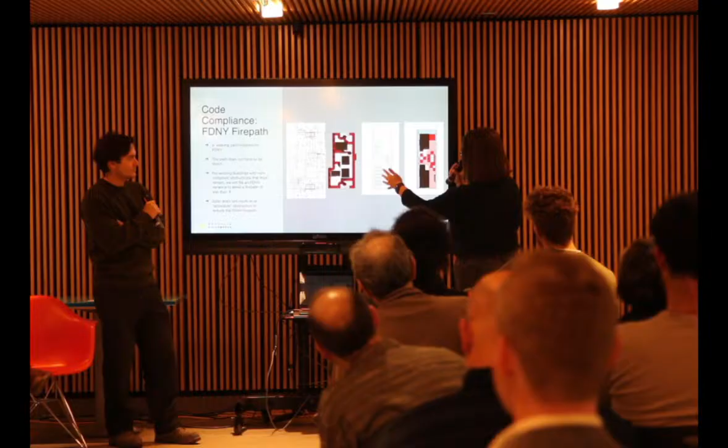But we start with that, and then the leftover vestigial space can go to solar, ideally. That's how the local laws are interpreted. Anything that's not HVAC, vents, zoning clearances, things like that. So you'll see here, this is someone's interpretation of the fire path and where they would put solar, and we were able to kind of optimize that. You want to fit as much solar as possible, especially when you're electrifying these days.

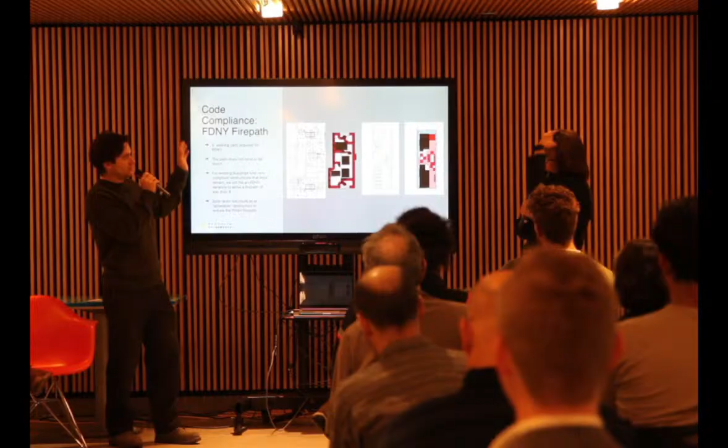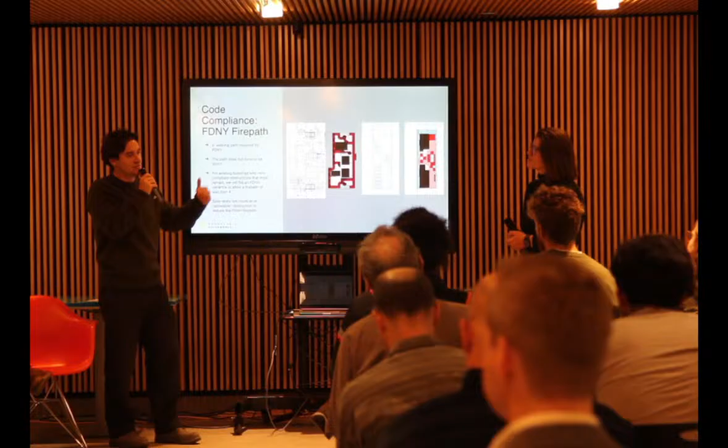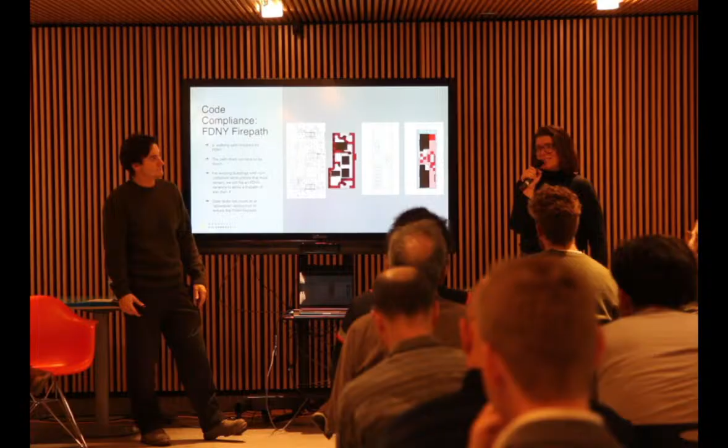Yeah, and the broader story here is that we do all of this for you. We take the heavy lifting of solar out of your hands. We try and make it as easy and seamless as possible within your designs that you share with us, to build something without extra headaches and to reduce hang-ups and DOB restrictions, things like that. One more thing to add, it's helpful to trade backgrounds so that we're always aligned, like any contractor that you're working with. So we love to just request MEPs, STs, all of the things so that we can make sure our filings match yours.

And the other piece, obviously we need to work within the DOB roof restrictions, but we know that often you're dealing with Local Law 92 and 94 on new construction, on new C of O, anything that involves changing the roof. You can often get tagged by the DOB to go back to the design and put solar on the roof. Local Law 92, 94 asks for a sustainable roofing zone. We've become very, very good at determining how that works with each building. The goal is to get you through the DOB as fast as possible without headaches.

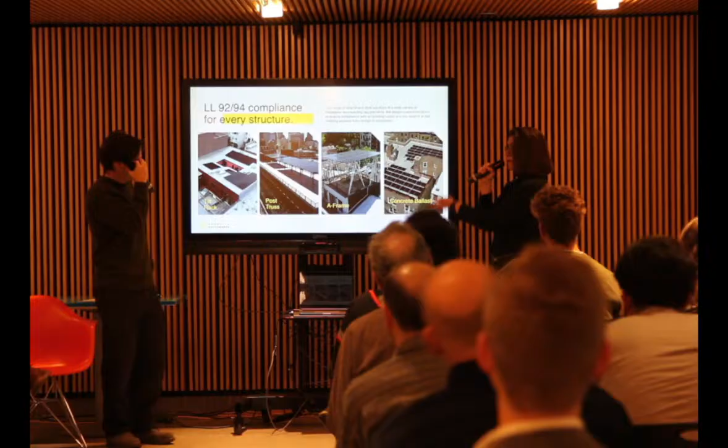In addition, our patented canopy is a great way to alleviate the issues and conflicts with the fire path. It's kind of our superstar of products, I'd say. And here's a cool case study we did. Do you want to talk?

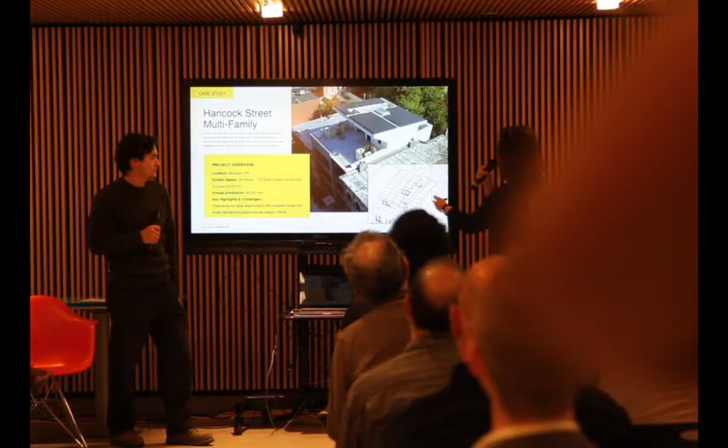Yeah, so this is a ground-up multifamily building in Bed-Stuy in partnership with Paul Castrucci Architects. It's a passive house, and Paul kind of had solar in mind the whole time by orienting his top roof due south, aiming to cover it in solar while maintaining that clear path. So you can see his initial sketch was pretty much followed through to the end.

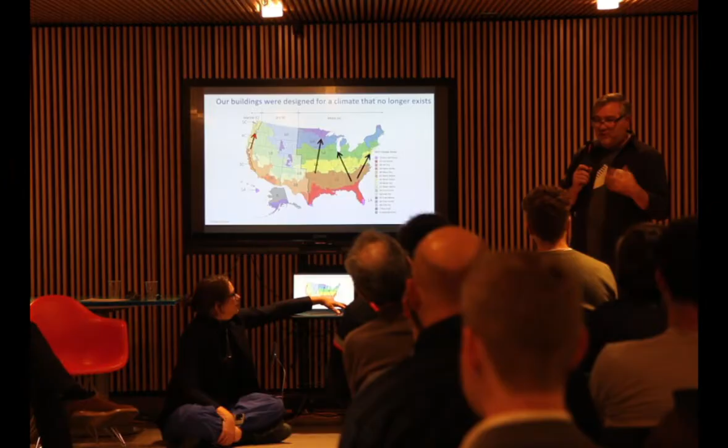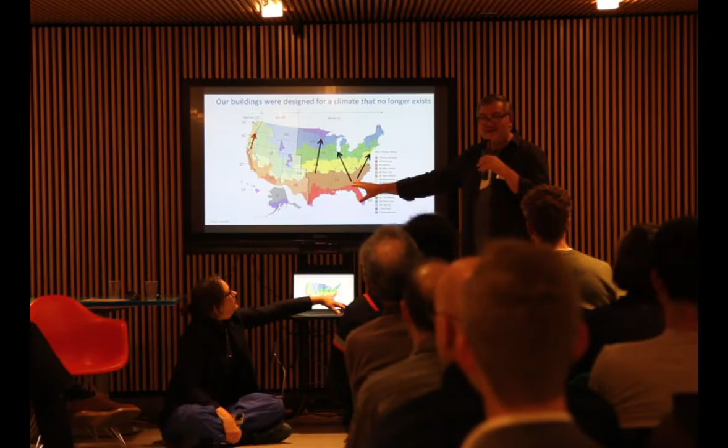On the West Coast, we focus all of our density on arterials, our highways. I call it truck-oriented density. It's not really transit-oriented density. It's a really horrific way of living. You're focusing all of the multifamily housing, affordable housing, in kind of the most toxic places in the city. And then when we add light rail—again, maybe this is a little bit different for you guys in New York—we're not really cognizant of planning comprehensively. We're not providing abundant affordable housing. We're not providing places for people.

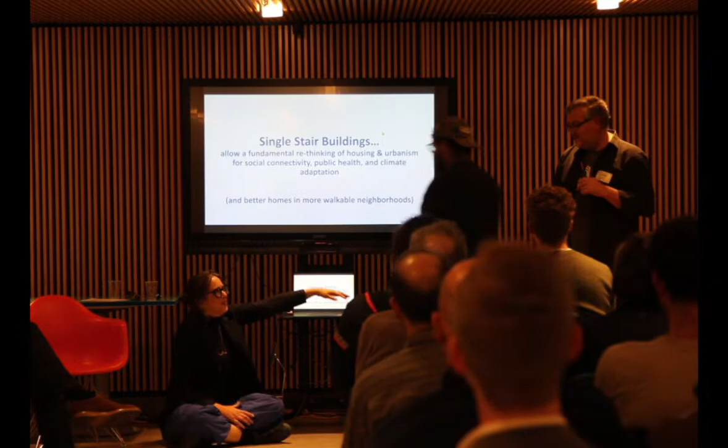Okay, so I've used single stairs like this, ability to kind of reshape the way we're designing our buildings, right? A fundamental rethink of housing and design to be more community oriented, more climate adaptive, and hopefully provide a better way of living.

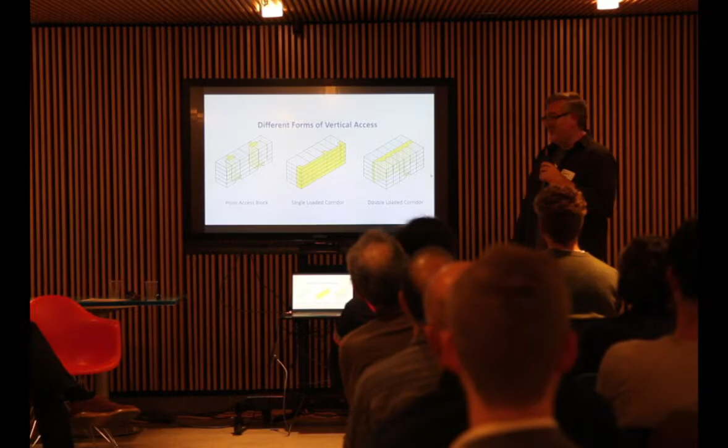No, that's right. So for those who don't know, there are basically 3 means of accessing units in multifamily buildings. Here on the right, the double-loaded corridor. Again, this is kind of the modus operandi of most multifamily housing in the U.S. It's like living in a hotel, right? Corridor down the middle, and then really small units on either side.

Single-loaded corridor is a lot less common. It's more common in Switzerland and Europe. I think in the U.S. we associate it with like motels, student housing, so we don't really see it, but I find it a very fascinating typology. On the left is the point access block, single stair building, workforce or urban housing the world over outside of the US.

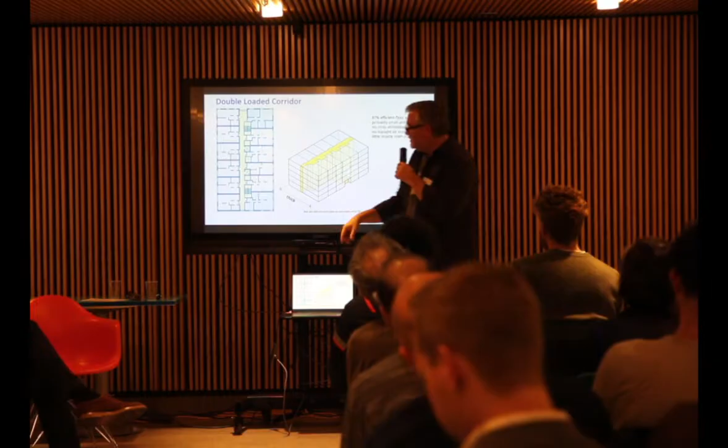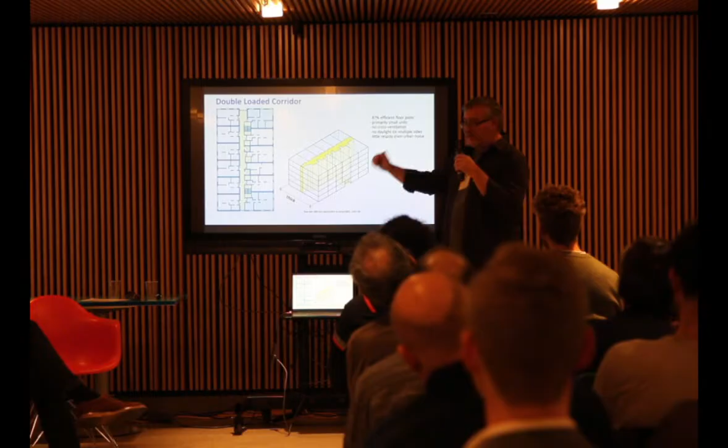The double loaded corridor, right? So we need 2 stairs, 2 means of egress. We need a corridor connecting all of the units to both of those stairs. It's really difficult to get the economics of larger units to work out. If you're on a busy street, right, you're not getting away from that noise, pollution. If you're facing west or south, especially in places that are hot, you're going to be exposed to a lot more heat. It's going to be difficult to mitigate that.

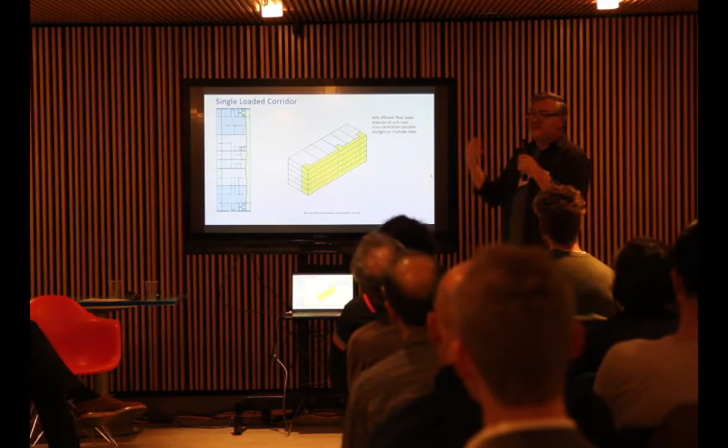Single loaded corridor, again, you do have opportunities for some cross ventilation. You can have daylight on both sides, but it doesn't get a lot of units in. You can't build a lot, and so I think it leaves a lot of FAR on the table. Cities in the US tend to put way more FAR on a per lot basis than other countries do, and so it doesn't really work out on the economics either.

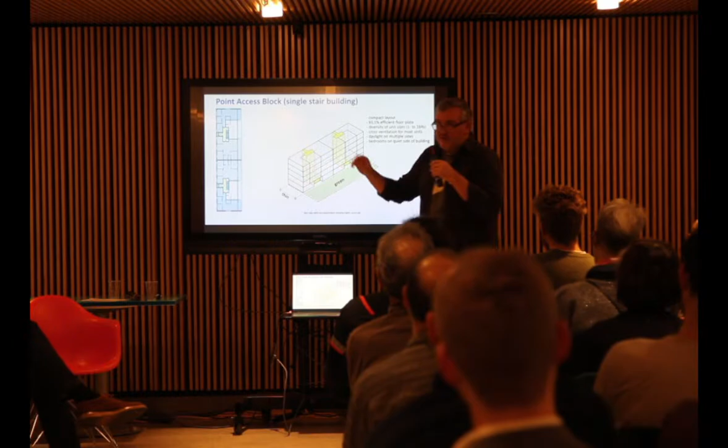Single stair building, what you generally have is a couple of units oriented around one stair with an elevator core, typically, not always, because of weird building codes. In cities like Seattle, we're allowed 6 stories. We can do 2 conditions of single stair buildings per lot. There's a maximum of 4 units around each stair core. So we can get kind of smaller buildings somewhere between like 10 and 50 units.

It's incredibly efficient. You get a broad diversity in unit sizes. It also, in this weird roundabout way, induces larger units. So a big issue we're struggling with in development is like, how do we get family-sized housing? Well, this is how the rest of the world does multifamily or family-sized housing.

Kind of the limitations of the International Building Code, I think, are becoming more and more apparent. This is a new development on a block in Seattle, wonderful highway here. You can see these are all micro studios. They have one window that opens. Pollution, noise, you're never opening your window here. If you're on the courtyard, you're in a fishbowl looking at people about 40, 50 feet away. There's no trees, there's no space for a community.

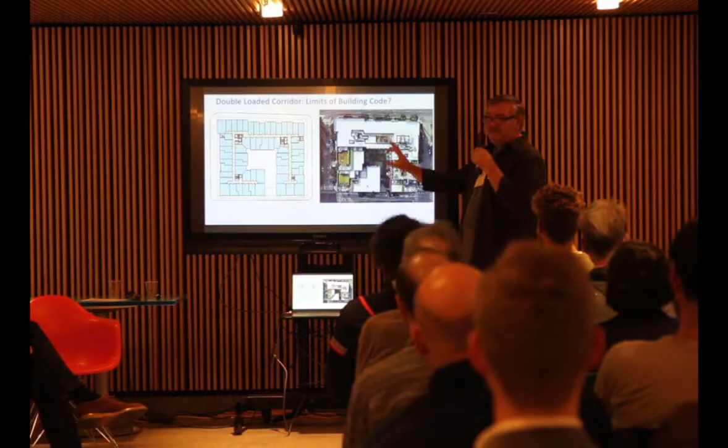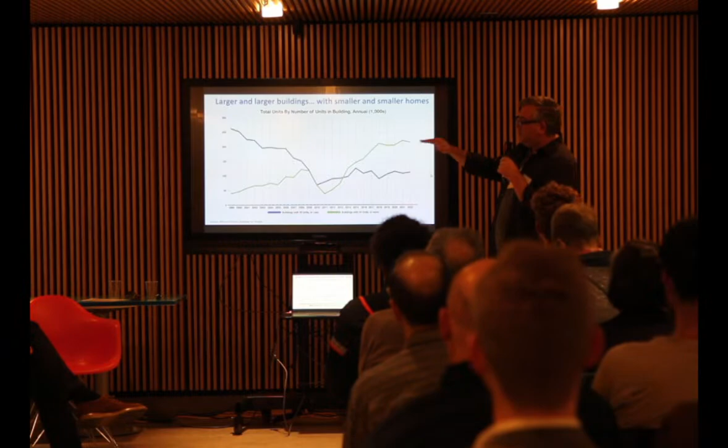It's a very radically different way of developing versus other places. Hasn't always been this way. These massive buildings are really, since the 2008 recession, kind of when everything flipped. We used to build, the blue line here, smaller and medium-sized buildings, and the green line is greater than 50 units, right? And so now those massive buildings are kind of the overwhelming majority of new construction in the US.

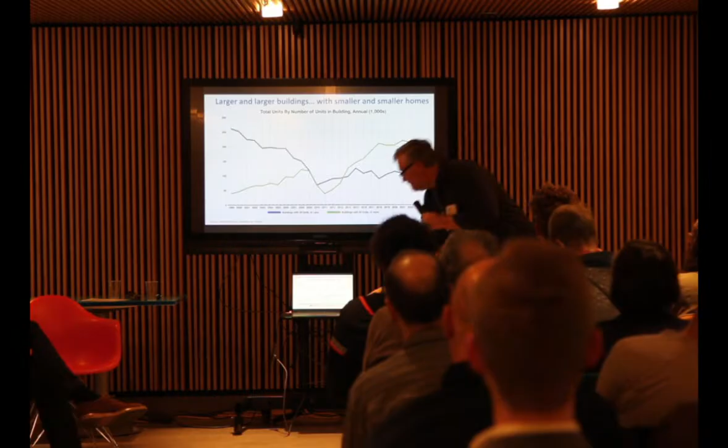Why do I think this is important? Well, our building codes and our zoning codes interact in these really fun ways to influence redevelopment.

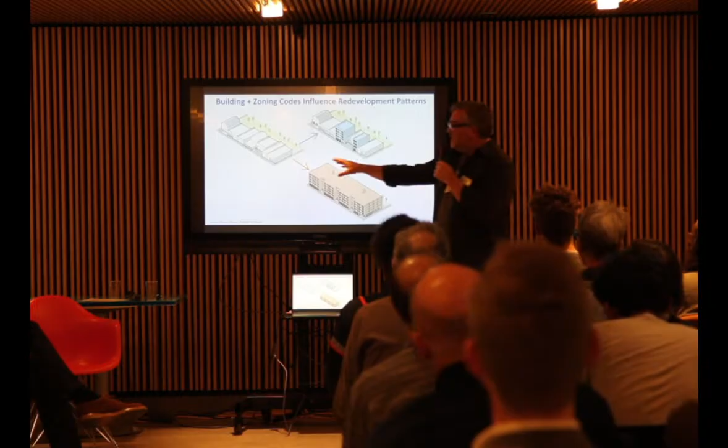In cities like New York City and Seattle, where we can do single stair up to 6 stories, we have this existing fine-grained urban street front. You go to Brooklyn, you've got 25, 35-foot lot buildings, 8 different things on one lot. So when you redevelop, you can just redevelop that one lot. Maybe it all goes at the same time, but it's 8 different owners going different ways, and there's more variation, and you still maintain that fine-grained nature.

But on the West Coast and most of the US, all of that is just going to be scraped because of our double-loaded corridor requirements and financing requirements, and we'll just put a big, ugly building with no space for trees or green.

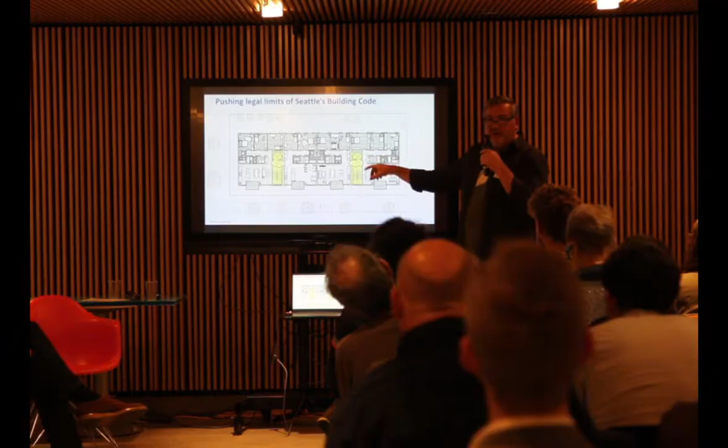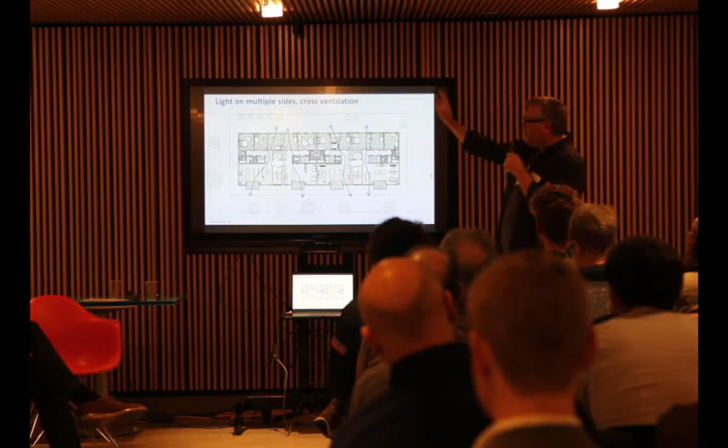I've highlighted the stair core here in the middle. So daylight in the stairwell, that's pretty rare in a lot of US buildings. It's extremely common in Europe and other countries. Our kitchen, living, dining are oriented parallel to the facade instead of perpendicular to the facade. Our bedrooms, this allows the building to cross-ventilate. We've got windows on 3 sides for these units, 2 sides for these units. This is dual aspect, triple aspect.

This is a lot like living in a detached house in much of the US. This was on a really busy street, so it was really important for them to put the bedrooms on the quiet side of the building, to get away from the noise when they're trying to sleep. Usually in Seattle, it's really cool at night. We don't have a lot of humidity in the summer, so everyone sleeps with their windows open, and it's just wonderful.

Our double-loaded corridors induce these deeper and deeper units. Planning departments and politicians want to ramp up the amount of built area on lots. So we have these in Seattle 80, 90, 100-foot deep buildings. The unit ends up being somewhere between 35, 45, 50 feet, but you kind of have to fill it up. All of a sudden this 2-bedroom unit has 2 full bathrooms, massive walk-in closets. The kitchen is like 40 feet away from the exterior of the building, so you don't have any daylight in there.

Well, in Europe, again this is kind of based on the Seattle plan as well, your kitchen is oriented the other way. You've got abundant daylight, you've got cross ventilation. Really, this footprint is kind of the same as the building unit plus about half of the hallway.

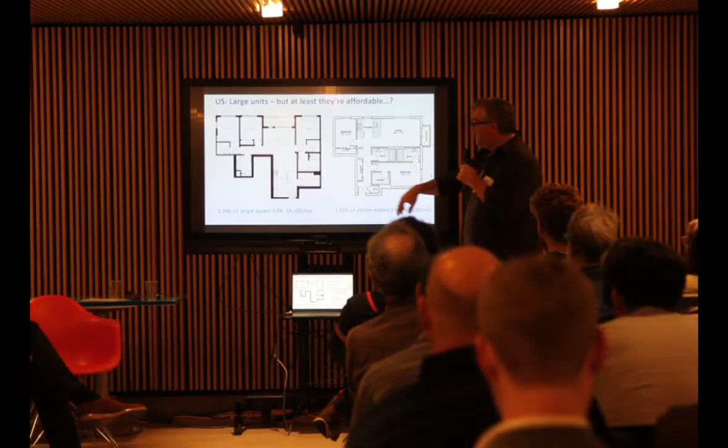And so we have these massive units in West Coast housing, 3-bedroom unit, 1,200 square feet, 2 full bathrooms. There's really only daylight on one side of the building, it faces north, so the entire time it's really, really dark. Maybe you're lucky and you can live on a corner. Well, you've got 2 bedrooms, and then it's so expensive it's designed for 2 roommates, so again, 2 full bathrooms. This isn't something you would find in most of the rest of the world.

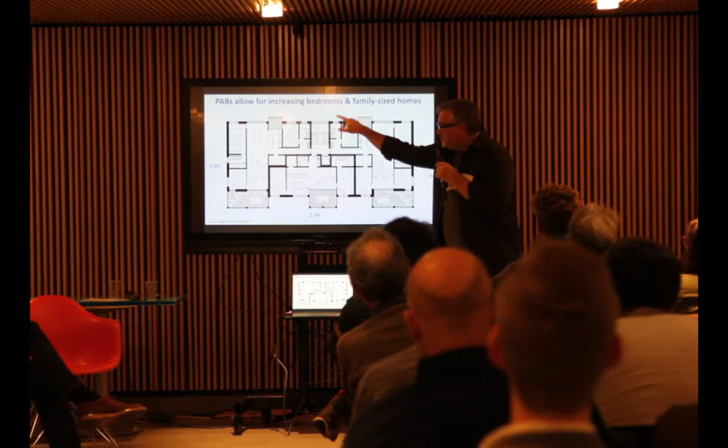Like I said, this is how the rest of the world builds full family-size housing. This is a single-stair building in Switzerland, 3 units per floor, central stair, and again daylight is really, really important. It has an elevator for a 4-story building. Stephen, I think, might talk a little bit more about this. You've got a 2-bedroom unit down here, a 3-bedroom unit over there, and a 4-bedroom unit over here. There are no windowless bedrooms, and the end units have daylight on 3 sides. It's just a very different way of thinking about habitating in the city.

I'm super fascinated with Swiss co-ops and Swiss building codes. There is no limitation on the number of single stair conditions in Swiss buildings.

It allows, I think, much more diversity in unit types and sizes. If you're a developer, that gives you more opportunity to tailor your building to different communities or different residents—you're not just doing everything for students or everything for seniors or everything for tech workers. The floor plate savings—you can get the same number of bedrooms in 4 units in a single stair building versus 6 in the double loaded corridor.

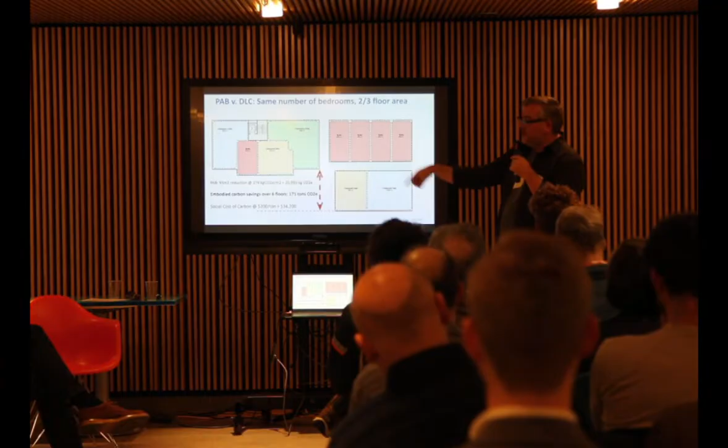We've started looking at some of the carbon impacts of this. Not only are you saving embodied carbon, you're getting the same number of bedrooms in 2/3 of the floor area. There are also construction cost savings associated with this.

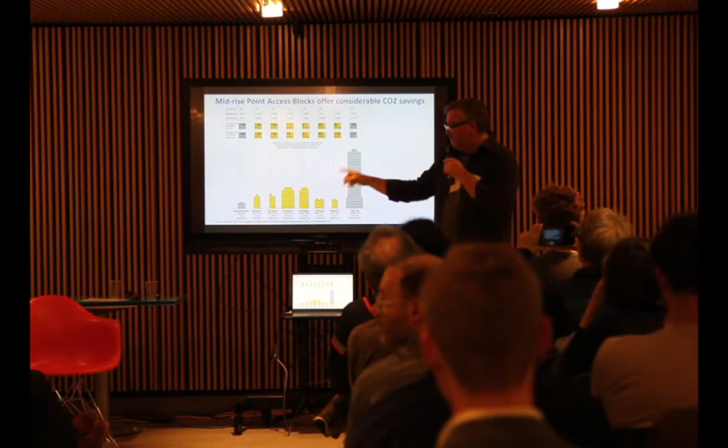For all of you embodied carbon LCA nerds—again, maybe not so relevant to New York City where you don't have a lot of mid-rise wood frame construction—Half Studio in Toronto did an LCA looking at the carbon impacts of different building types, all the way from detached housing to high-rise, and the 6-story wood frame building, pound for pound, was the best from an environmental standpoint.

So, does fire burn differently in the US versus Canada? Because our codes are a complete anomaly. Canada's single stair regulations are actually more restrictive than ours, although there is an effort to change that at a much higher level, at the federal level.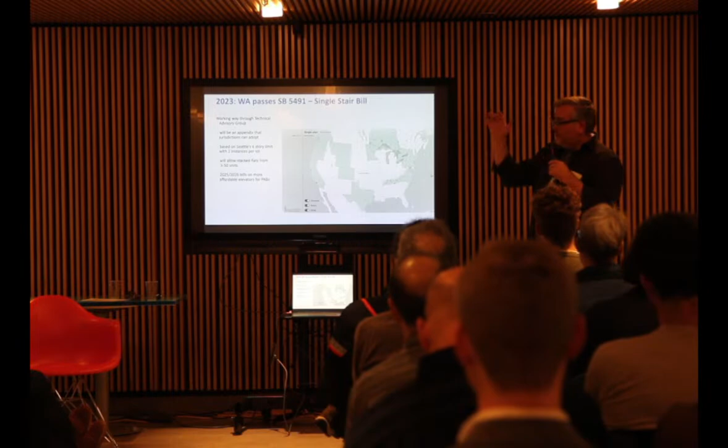In 2023—well, Seattle has allowed single stair buildings for 50 years. Originally we didn't have sprinkler requirements, there was no height limit. In the 80s there was a lot of anti-development insanity around the city, and most of downtown was downzoned. At that point the single stair height limit dropped down to 6 stories, and it's pretty much stayed at that point the whole time.

In 2023, I worked with a state legislator to basically take Seattle's legislation statewide, so that more of the cities around us who are also having housing crises could have more opportunities for really wonderful infill buildings. It passed as a study bill, and it's now being reviewed by an advisory committee. I don't know where it sits with that.

But related to that, I've started having conversations with people in Michigan. Stephen and I know each other from Twitter for like 20 years, and we started talking about single stair a long time ago. Now there are about 20 states, I think, that have some form of single stair legislation, either as an advisory bill, a study bill, or actual legislation.

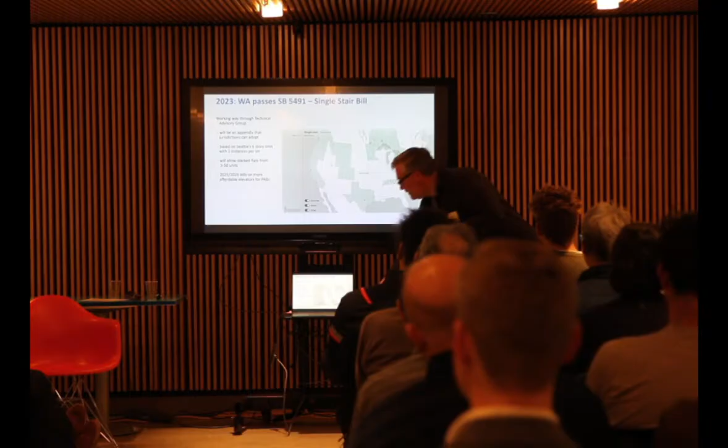Blows my mind. The future of the IBC is a little bit—

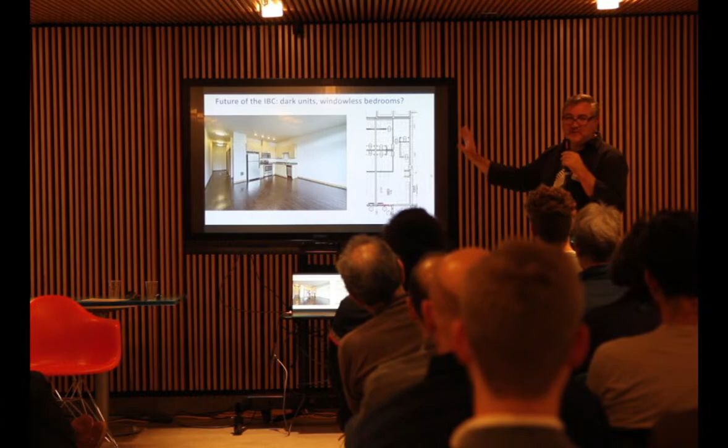This is a re-entrant corner of the building. There's a small courtyard here, and so there's only 1 window into this thing. This isn't designed for families. This isn't designed for—maybe it's designed for students or roommates—but the quality of life in that is really, really inferior.

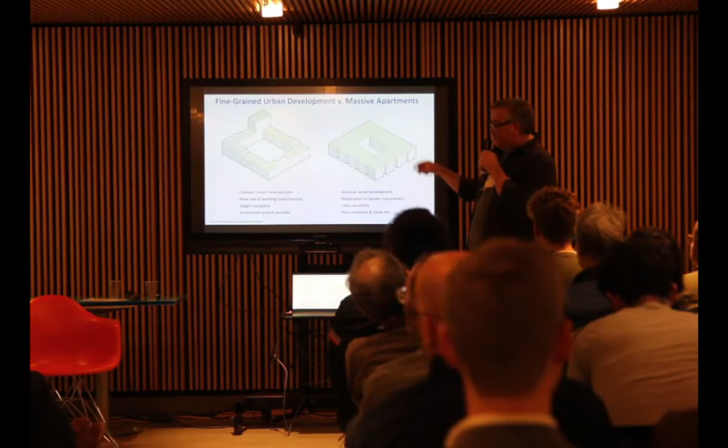And when we start to look at the neighborhood block scale, we get that kind of fine-grained urban development, opportunities for different building heights, different types of buildings, different ownership tenures, versus one big block being massively redeveloped.

More opportunities for open space, more opportunities for air to flow through the network. This form of development is really common in a lot of European eco-districts. It allows for radical diversity at the block level, economically and socially. You could have townhomes, market rate housing, student housing, co-ops, self-built homes that people come together and build, arranged around a courtyard. This is how people can develop in other places, but it's really difficult to do that here, and so we don't get that economic and social mix.

I also think we need to be taking issues around urban morphology, how we reshape our cities, and climate adaptation, how heat is going to affect certain areas in the future, much more seriously.

Can we start to view redevelopment of eco-districts differently? I was in Hudson Yards today, and it's the most sterile place I have ever been. There's a park, but it's got cars on 4 sides. There's no places for kids to play. My mind was blown at how sterile and bad that development was versus something like this.

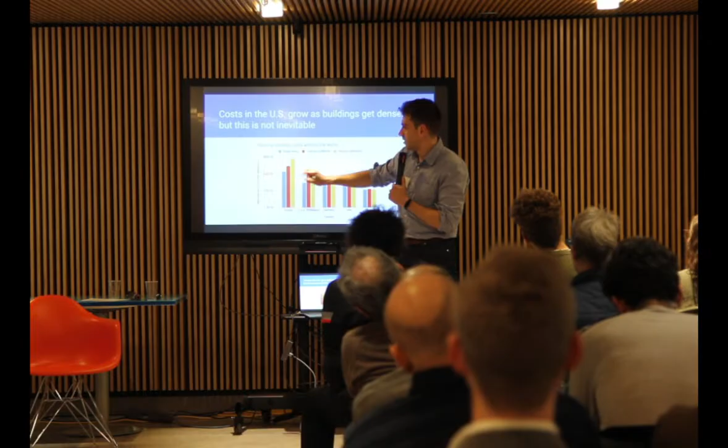So we have some things that get more expensive. You need an elevator in a mid-rise apartment building. You don't need an elevator in a single family home. You need more advanced fire alarm systems in a mid-rise that you don't need in a single family home. So those costs rise, but then you have some other costs that fall. You only need one foundation, one roof, one lobby, whatever. There are fixed costs, so you have what economists would call economies of scale and diseconomies of scale. They balance each other out. In the US and Canada, this is not the case. As the building gets denser, the per square foot cost just rises and rises and rises.

And this is a problem because we are, as a society, building more multifamily buildings, realizing the importance of cities. It used to be in the 90s, almost all development was in single family houses, and increasingly it is moving towards cities for environmental reasons, economic reasons, whatever it may be. And with it, we're getting an increased cost of construction that you don't see elsewhere.

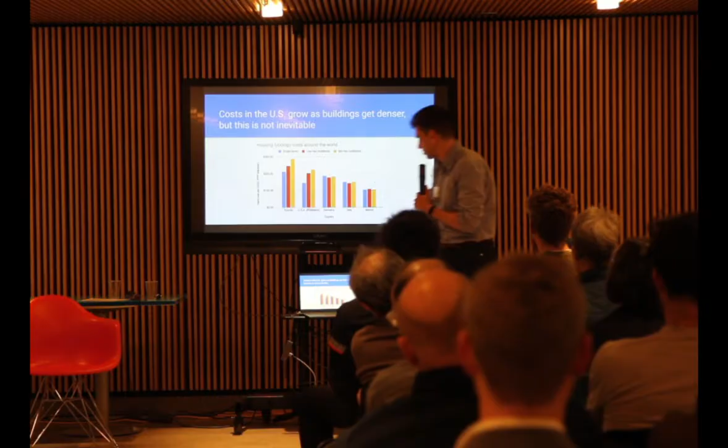And I am going to make the assertion that the reason why we have this cost gradient as the buildings get denser is because of our codes. It's not something inherent in the US or Canada that you don't find in Germany, Italy, Mexico. It is fundamentally in the codes. And it is fundamentally a fear of heights in the codes.

So as buildings get taller, code requirements will naturally grow. This is the case everywhere in the world. But in the United States and Canada, the growth happens in much larger thresholds and in much more dramatic ways than abroad. So the code requirements come, and they come sort of heavy and fast.

So just to give you some examples, at what height is a second stairway required? Typically in the United States, it's around 4 stories. In New York City, it happens to be 6 stories. In Europe, Asia, Latin America, probably something more like 16 stories you can build before you have a second stair. These are approximations, because obviously Europe has a lot of different countries, but you can also think of Europe as a stand-in for Asia and Latin America.

Australia, it's pretty similar. Standpipe, this is the pipe for water that's essentially an extension of the hose that the fire department uses. Typically in the United States, it'll kick in around 4 stories. I think in New York City, it's actually sometimes 7 stories. In Europe, it'll typically be a high-rise building, so around 8 stories.

Stretcher elevator, like the elevator is so large that it can accommodate a fully flat stretcher. Typically in the US, it's 4 stories. In New York City, I think it's 5. Typically in Europe, it'll be around 8 stories.

Sprinkler systems, every single new building pretty much in the United States, except for single family houses, will have a sprinkler system. If the code people had their way, they'd even be in single family houses. They are in California and Maryland. In Europe, frankly, you're unlikely to ever see a sprinkler system, but if you do, it'll probably be around 20 stories, something like that.

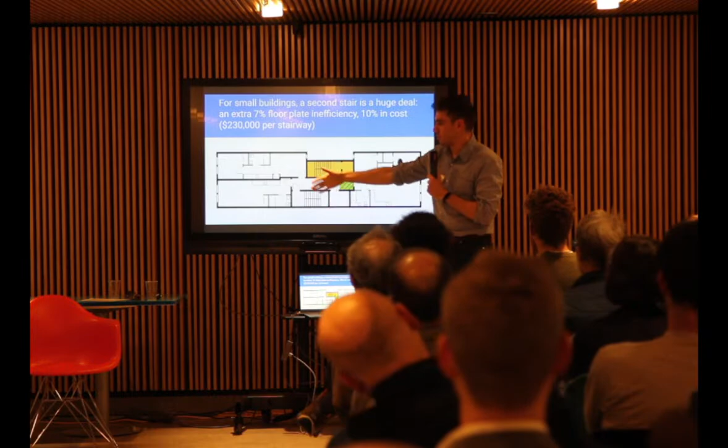So single stair. So for a small apartment building, which is absolutely not what the code writers have in mind at the ICC when they imagine an apartment building, but in New York we have a lot of these. This one happens to be in Jersey City, but it's very similar. 25 feet wide. The lot is 100 feet deep. The building, let's call it 80 feet deep. If the national code writers had their way, it would have these two stairs right here.

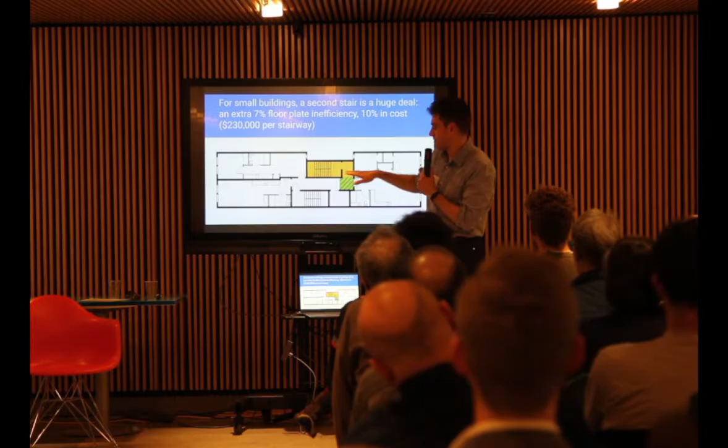It's going to take up about 7% of the building. 7% of the building is a lot. 7% can definitely make or break a project financially. So it takes up a lot of the floor plate. It's about 10% of the cost. One single stairway for a 4-story building is about $230,000 roughly. So it's a big cost.

Next, talk about elevators. So elevators in the United States are about 3 to 4 times as expensive as elevators in Europe, Asia, the whole rest of the world. As a result, we tend to have very few of them. So here's just some examples of quotes for elevators. These are 5 or 6 stop elevators. So in Belgium, Ile-de-France outside of Paris, once you do the conversions of currency and purchasing power, you'll get $50,000, $60,000 for the elevator. Whereas in the United States, you'll get $170,000, $180,000. So they're far more expensive. As a result, we tend to build a lot more walk-up buildings in the United States than you find abroad.

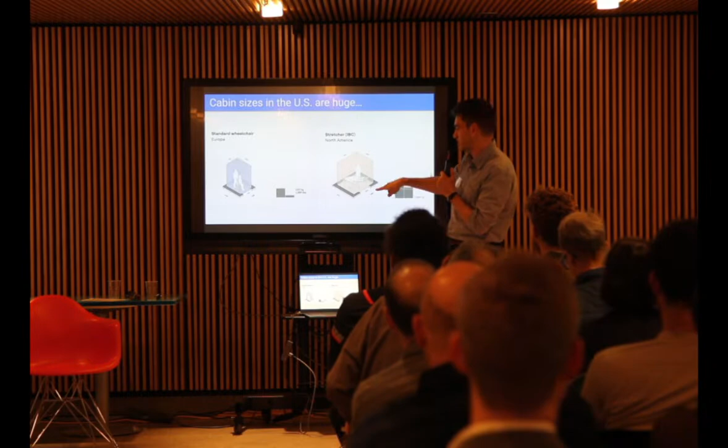An elevator in the United States is about twice the size of an elevator in Europe for a mid-rise building. In Europe, a mid-rise building elevator will accommodate a wheelchair and a person standing behind it, but it will not accommodate a stretcher. Medical responders will take the stairs or prop you up in some way. In the United States, it has to accommodate a stretcher and also a turning radius for a wheelchair, though most power chairs can't even turn in these anymore, so it doesn't even effectively function as that. So the elevators are about twice as big, and that drives a lot of cost.

Beyond that, we have a different technical standard. Beyond the size of the elevator, the building code is a document. It's not exactly fun to read, but you could probably understand it more or less. But it references all these other technical codes. So the building code will say the hallway has to be this wide, the wall must resist fire for 1 hour, but then it'll say the elevator has to be built to some other standard—it'll reference another document. There's one for sprinkler heads, and any part of the building you can imagine has a standard it references.

There's been a process throughout the rest of the world of harmonizing standards so the same gypsum board, the same elevator, the same sprinkler head, any doohickey you can imagine, can be sold all around the world. The United States tends to sit outside of this consensus. In elevators, every country in Europe used to have its own elevator code and standard, and then in the 70s and 80s they harmonized them, creating a European elevator standard. Given that 3 of the 4 major elevator companies are headquartered in Europe, the entire rest of the world started to adopt the European elevator standard. At some point in the 2010s, even China adopted it—a knockout blow to every other standard in the world—and the European standard took over.

So whether it's a whole elevator or a little part for one, you can sell it all throughout the world, more or less the same thing. The exception is the US and Canada—they've stuck to their own standard. This means we have a much more restricted market. It costs a lot of money to certify something to a standard, rightly so, since elevators are safety critical devices. It's important that every door, every button meets the exacting rules of the standard. But it costs the same amount of money to certify to the global standard as to the North American standard, and North America has many fewer elevators—the United States has about as many elevators as Italy or Spain does individually. So naturally companies certify to the global standard, and only if they think they can sell tons of them do they also certify to the North American standard.

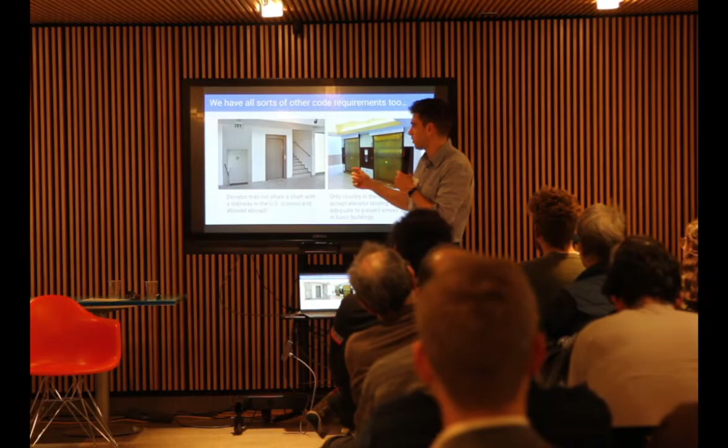So we find all of these other code requirements, generally for fire protection reasons, that make it more expensive to add elevators, and you see it all throughout buildings.

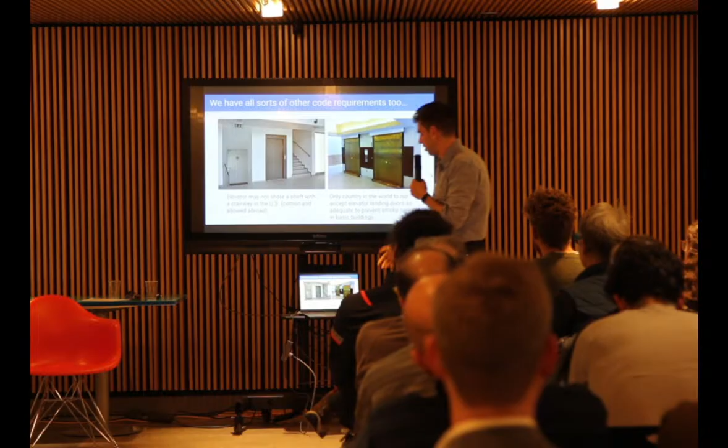All right, plumbing, single stack venting. The plumbing codes in the US are very anomalous as well. Just as an example, you have what's called your drain waste vent stack. So you flush the toilet, water goes down. Here's a toilet, here's a sink, whatever, water goes down. As a child, maybe you're bored at a restaurant, playing with a straw, you stick the straw in your water and put your finger on top, lift it out, and the water comes out. You don't want that to happen in a drainage system. You want everything to flow properly. So you don't put your finger at the top, you let water flow down through it.

In the United States, we decided through some sorcery in the 19th century that just having this little thing go to the atmosphere and introduce air into the system is not enough. We need a whole separate system of vent piping that connects at every single fixture, doubling the cost of this whole stack. It's necessary at some height, maybe 10 or 20 stories, but not necessary for a single-story building as we require in the United States. It's just one example of the over-dimensioning and overkill we have in our plumbing systems.

And then waste collection, I'll breeze through this one quickly since I think I'm over time. So we have a very expensive system.

A lot of things I was talking about, elevators, venting—these are mostly, well not for elevators, but the venting for example in the plumbing system—mostly an initial cost to the building. But our buildings in the United States are also extremely expensive to operate. It's very common in Europe to find a new building where the condo fees are 100 or 200 euros a month. In New York, they maybe start at 500 and go up to 1,000 or 2,000 bucks a month just to operate the building per unit.

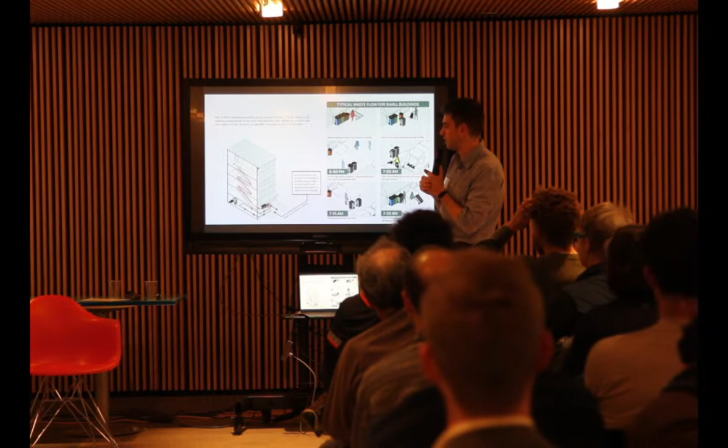One of the major reasons is waste collection. In New York, we assume the building has to collect all the waste in the basement, and then someone has to bring it out. We used to dump our trash bags on the sidewalk three times a week. It was very disgusting, there were lots of rats. So now we're putting them in cans. But this means you need to pay a super or a porter to come to your building three times a week to bring the trash out, and three times a week to bring it back in.

For a small building, you're constantly having people come out to take the trash. And when the Department of Sanitation collects it, they have to do it manually. We can't have the mechanical collection that the rest of the world has because we have a whole wall of parked cars between the street and the waste container, so they have to drag it. It's one of the most dangerous jobs in New York.

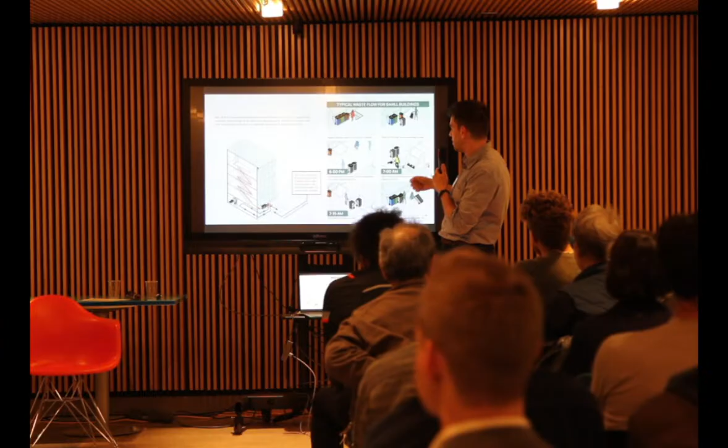Working for DSNY. Whereas in Europe, or in some parts of Europe and some parts of Asia—not as common, but it happens in many places—they just put out bins, you take your trash to them directly, it gets collected mechanically. Very efficient, very safe, far fewer injuries, and it costs nothing to the building. In New York, buildings pay on average about 75 bucks per month just to move waste from the building to the curb. If you have a common collection system, you pay nothing at all.

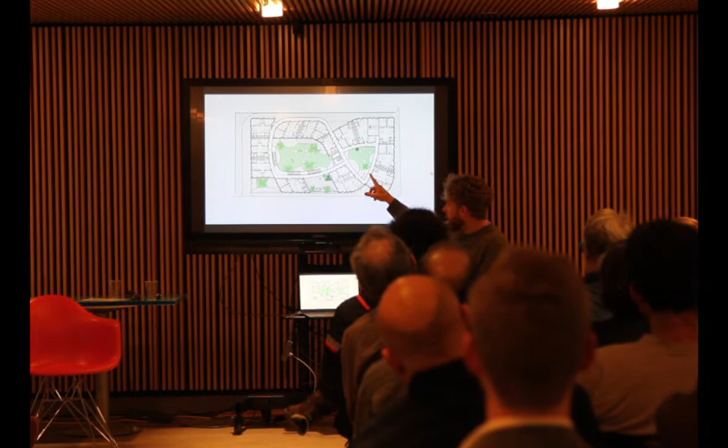This is a two-stair building, but one of them is tied to the elevator core, open to the elevator the way Stephen was sharing, which is not legal in America. The other, which we found is legal in America, is having an egress stair that is also an exciting stair, one that is part of the experience of the building and not something inside a concrete shaft.

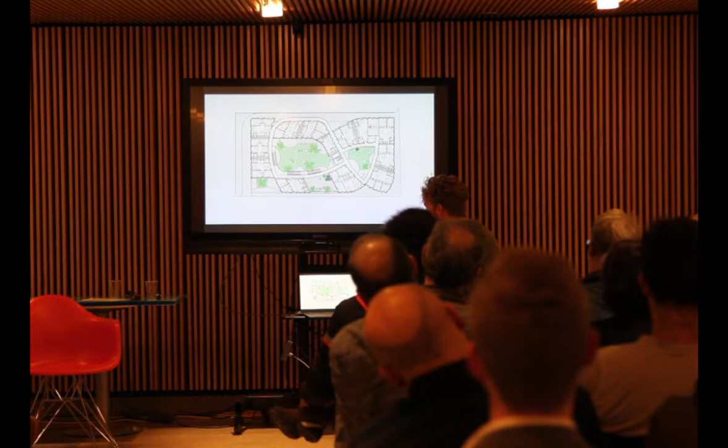You can also see here how the corridor moves between the inside and outside of the building, defining a slightly different variation between units and buildings. And here are the spaces of gathering and communality throughout, along with a version of a single unit.

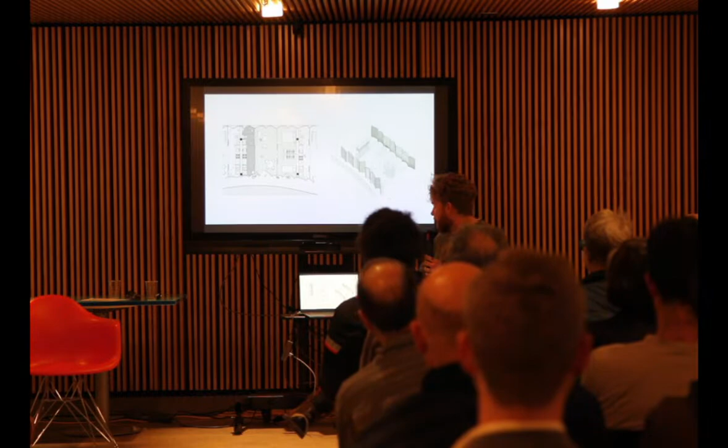Through this project we were also confirming the importance of multiple exposures and having a dynamic relationship to the atmosphere and the outside—pushing back against the single exposure of a double loaded corridor, and inviting the dynamism that comes with openness on both sides, along with the opportunities that affords for cross ventilation.

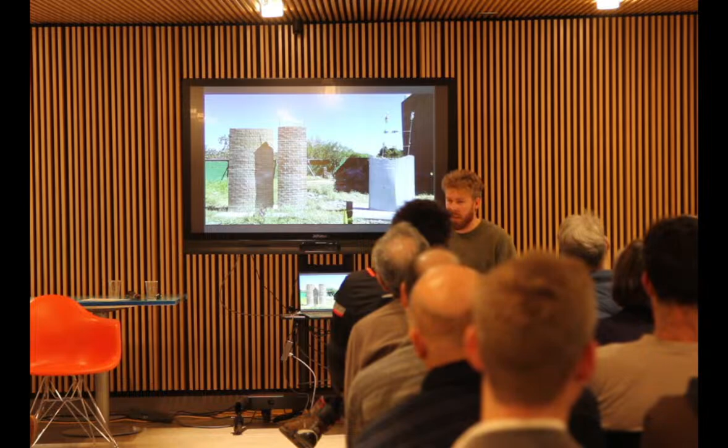The other thing we looked at here, which is not as relevant to the topic today, was the manner of construction. Mexico is a different climate than New York, so there's a bit less pressure on the performance of the envelope. We're also thinking about how, in this context, labor is less expensive than material.

In New York, a lot of times we look for ways to reduce manual labor because that's one of the more expensive things, so we look to prefabricate things, panelize things. In Mexico it's the reverse. Labor was actually much more affordable than mechanical means. So we looked at a few different methods of constructing components and ultimately landed on...

Prefabricated concrete units that are the heaviest that a single person can lift and install by themselves. So that was sort of the parameter around the geometry that came to inform the way that this construct realized the original architectural goals of the envelope.

You can see here how it was being mocked up, and then ultimately as it started to be put in place. Of course, you also see here no thermal breaks - thermal bridging is not a concern there. So there were certain simplicities offered by the Mexican climate.

But ultimately that manifested itself in a unity between the construction method and the architectural expression, and manifested into a really interesting, beautiful building that has an animation of outside, of landscape, of people being together.

And this is a recent photo series that Iwan Baan did, going back to visit the building 4 years after construction to see how it has been animated, and it's been, I think, a success in the ways that we hoped it would.

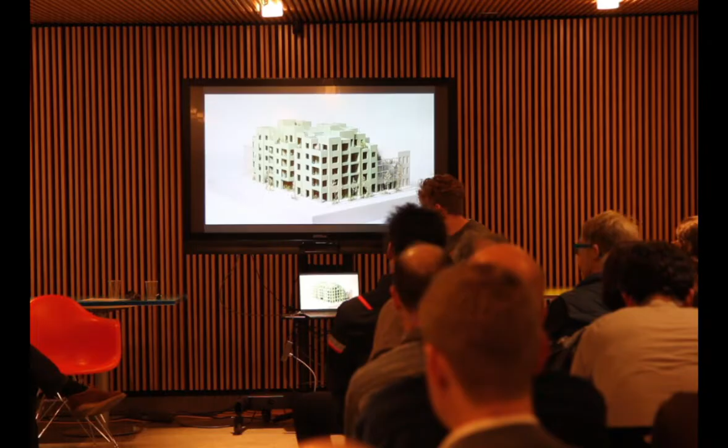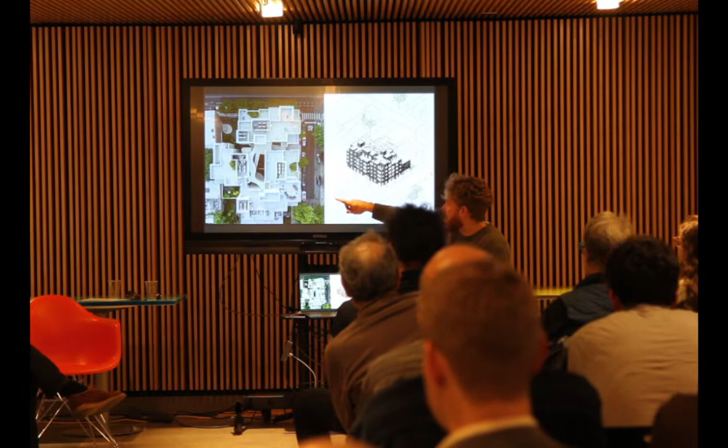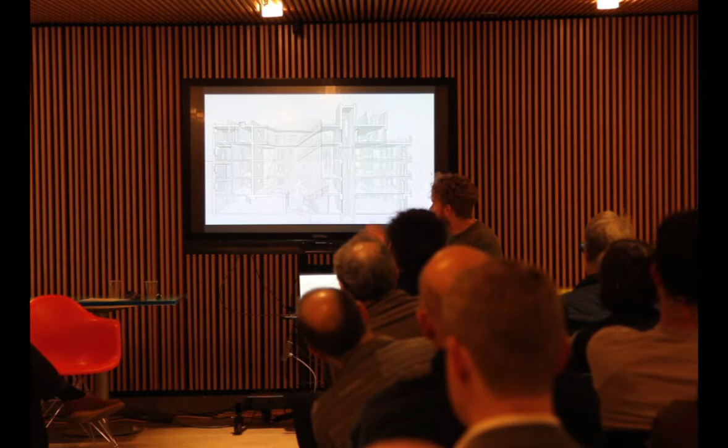So you can see here the entry is into a central courtyard, and then the egress stair, one of the 2 egress stairs, is different at every level. So it sort of dances its way up through the outdoor corridor, and then instead of using a traditional guardrail, we use a stainless steel mesh that takes on the complex shape of those different corridors relating to one another. So you can see here the stair going up through them. Each of those units has exposure both to the outside world and to the interior courtyard, where you have an opportunity to relate to your neighbors.

And so you can see here some of the different characters of spaces that are made possible through it. This is that court that I was saying is behind that street wall we mentioned. And then how some of the life of these units has started to become animated. This is one of those outdoor living rooms of a balcony. This is a window onto that courtyard. So there's many different types of relationships.

Some offer you an opportunity to create more of an openness to your neighbors, not unlike if anyone's ever been in the Jordaan in Amsterdam, the historic neighborhood. The relationship between one's interior space and the community is very different. There are no curtains, there's no stoops, there's much more openness. So I think this offers also a variety of opportunities to relate to those around you.

And this is what I was saying about how these spaces have started to be animated by the life in them. And then this is recently how the stainless steel mesh has succeeded in what we were hoping it would become, as this growing wall, to actually bring the ecology not only into the base of the courtyard, but up through the spaces inside of it.

And then most recently, we're currently working on a project on the Gowanus Canal, which is experimenting with pushing these ideas to a much larger scale. So 450 Union is a 20-story building. It's part of the upzoned Gowanus Canal, which, if you have not been biking through there like I do every day, it's maybe not the most spectacular collection of buildings that New York has ever put together, and I think a lot of that is based on some of the limitations that we've talked about today.

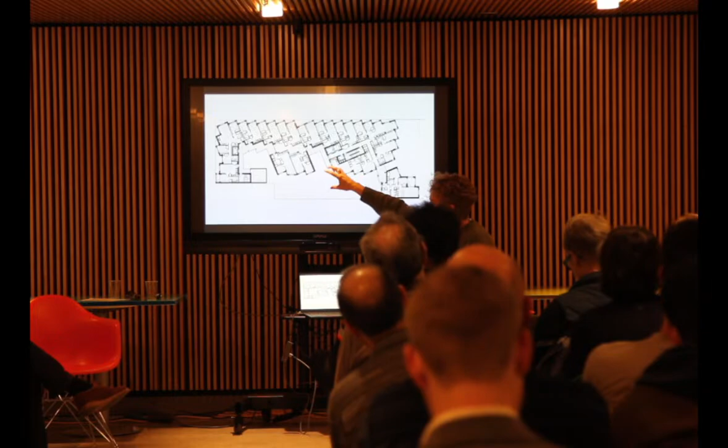And you can see here it's sort of a mixture of the double-loaded corridor, which is really the result of pressures of the economy like we've been talking about, but as well as many single-loaded corridors and sort of gaps between those. And then that leads to more variety than on the earlier projects, and also a combination of balconies.

And in this project, we have Juliet balconies, which are very common in Europe, which is essentially a 0-foot balcony, but it allows you to open windows. And so this is one of those here, where you can have a truly fully open window with a small balcony in front of it. So it breaks the difficult building code requirement that you can only open a window 4 inches for safety reasons, but that's not super satisfying from a life experience standpoint.

So a Juliet balcony is actually one way that we found to create a more robust opportunity to open windows in a city where there are beautiful moments to do that. And this is that relationship on Union Street, some of the courtyards that are at different heights and different levels, and how those are porous through to the city below.

And we are currently, I think, at the 10th floor of construction right now. So these were taken maybe 2 weeks ago. And we'll see how this one turns out, but I think we're hopeful that some of the successes of the earlier projects will be able to manifest at this scale, and we're hopeful with Tank House that these will also be proof of concept of these things, not only at a higher density, but also within the context of affordability. That's it.